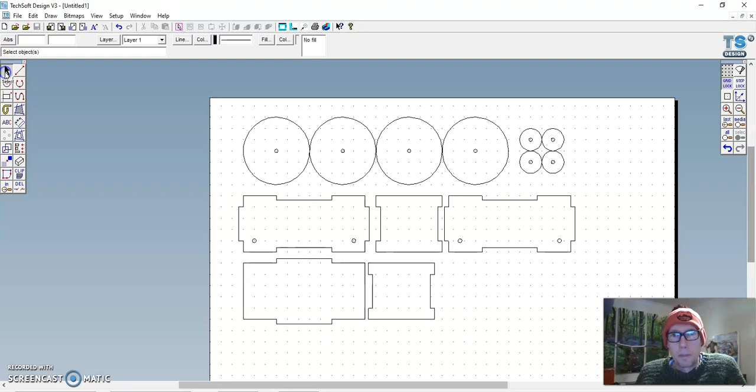So this video supports your roller coaster project. I'm going to talk you through how to make a kit of parts for your roller coaster car. I'm going to do a very simple kit of parts, talking through some key points and how to use 2D Design. So this is the kit that I'm going to make, 4 wheels and a carriage, I suppose. So say goodbye to that.

Start with wheels. Make sure you've got gridlock selected. Circles. So you can choose any wheel size you like. I'm going to go for 30mm radius, but it's up to you. Remember, the smaller the wheel you use, the lighter your car will be, and the less it will cost, which will be a bonus. So you may decide to go for smaller wheels than me. You may decide that big wheels roll faster. So this is a balance between big wheels that roll faster and small wheels that are cheap. It's up to you. So any wheel size.

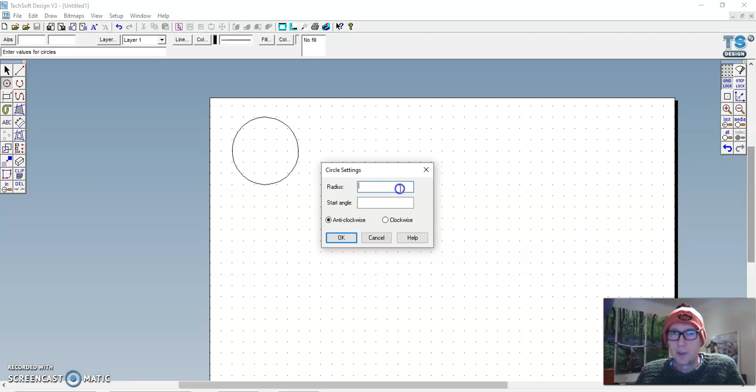So one of the decisions you've got to make is whether to have the wheels turning on the axle or the axle turning in the body. I'm going to have wheels that are tight on my axle and that turn in my body. So the axle material is 3mm diameter. So if I double click circles, it asks me for a radius. Now 3mm diameter, as you know, you've got to halve it. So that's a 1.5mm radius. And look, it's given me a little circle. I'm going to pop it in the middle of my wheel there. So that little circle, 1.5mm radius, will be a tight fit on my axle.

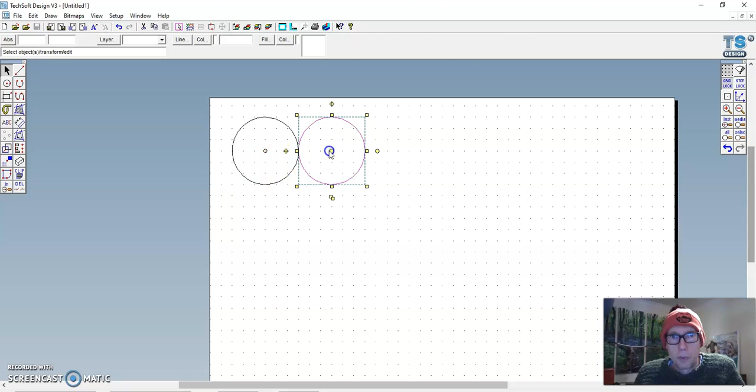Of course, I need 4 wheels. So I'm going to select it, copy it, position it, copy it, position it, copy it, position it. If you want more wheels, which you may do, roller coasters traditionally have more wheels, you can do more copies. But I'm going to stick with 4 for this simple tutorial.

So let's work on the body of the car. I'm going to make sure my gridlock is on again. Now of course the body needs to be longer than the space between 2 wheels. So I'm going to make my body this long. And about that high. Okay, so that's going to be the side of my car.

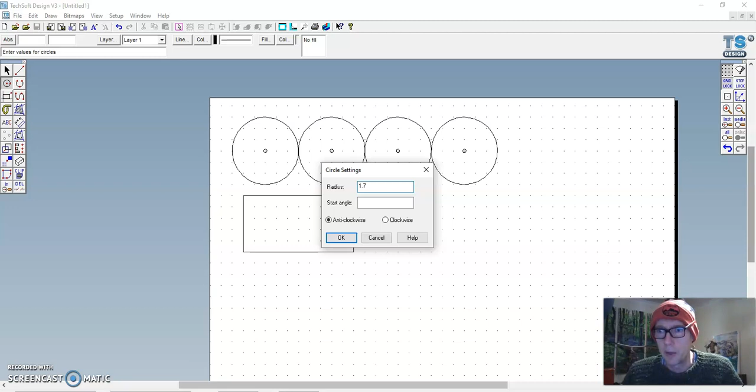Now it needs holes for the wheels to pass through, and these holes are going to be loose fitting holes. So I'm going to increase the radius just slightly. I'm going to use 1.7, and 1.7mm radius will give you what's called a running fit. The axle will pass through, but it will turn in the hole because the hole is slightly bigger than the axle. So I position my 1.7mm hole there, and I'm going to pop another one there. So I've got 2 axle holes, and the spacing is wide enough to get the 2 wheels in without the wheels touching. So that's going to be the side of my car.

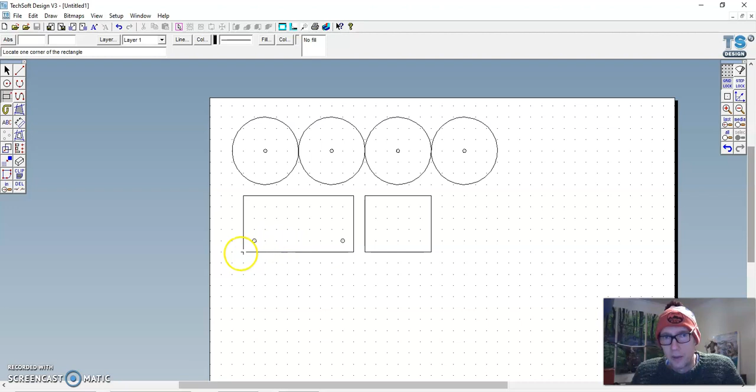The front, I'm going to make the same height as my side. I'm going to make it about that wide. Okay, so that's going to be the front of my car. And I need a base. So the base will need to be the same width as the front and the same length as the side. So that's 6 centimeters or 60mm. So I go the same length and 60mm deep. Okay, so I've got a side, a front and a base. I'm sure you've worked out that I'm going to need 2 sides and 2 fronts, but I'm going to finish drawing them first before I copy them.

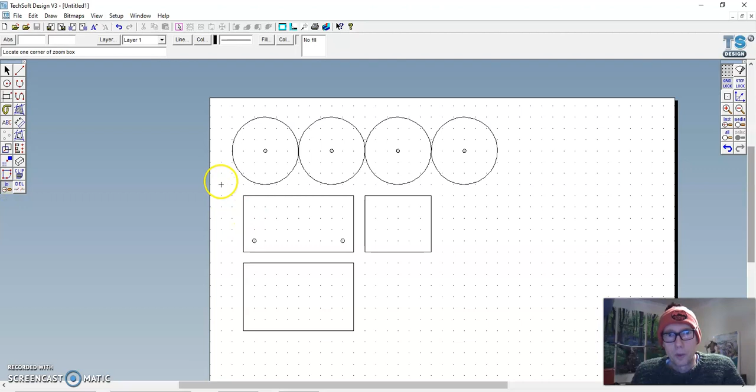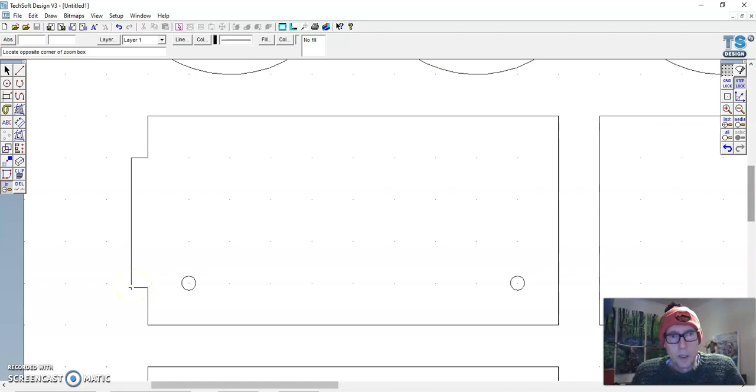When I assemble these, it will be 5 parts, I want them to lock together. And the material we're going to cut them out of is 4mm thick. So I'm going to make some little locking features. I'll zoom in a bit so you can see. So this time I'm going to put step lock on. The step lock will allow me to do 1mm jumps. So I'm going to produce a feature here. Right, I'm going to make it 30mm long and 4mm wide. Okay, so that's 30 by 4.

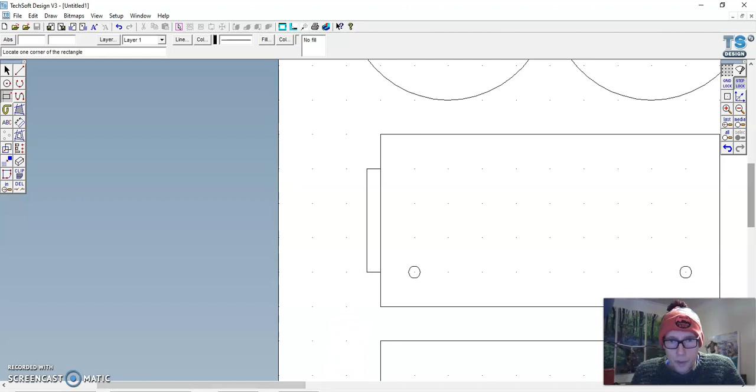Oh, I had the wrong tool selected. Rectangles. 30mm by 4mm. That's there. And I'm going to put another one here, exactly the same. So 30mm by 4mm. Remember, you're looking at this pair of numbers here to give you the size of the object.

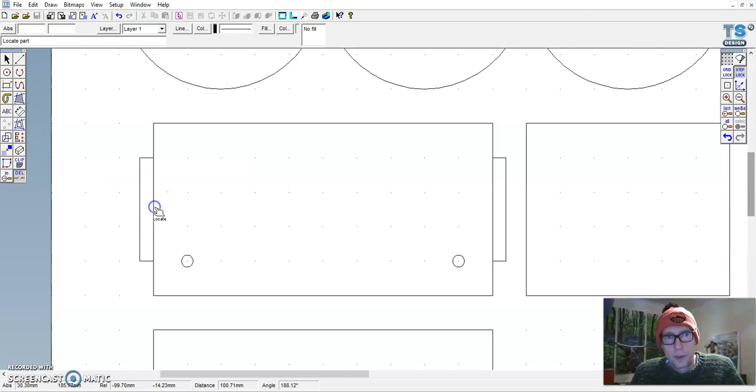Then I want that all to be one part, so I click and hold the delete tool, choose the second delete tool, and delete those lines. Now I've got a couple of tabs on the side of my car. I now need an indent here to locate that tab into. So I use rectangles.

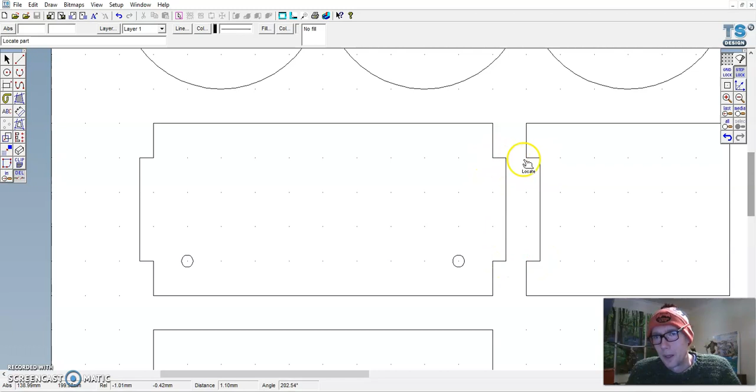This time it's going into the part. So on the sides I've got them sticking out, and on the fronts I've got them cut in. Delete the bit you don't want. Now I think you can see that that tab is going to fit into that slot. They're both exactly the same length, and they're both 4 mm thick. The 4 mm is really important because that's the thickness of the material.

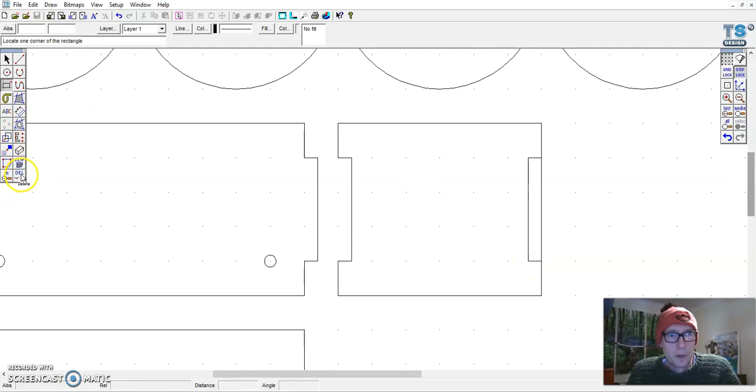And of course I'll need another one here. So rectangles, make sure you get the alignment the same. Make sure you get the length the same. 30 by 4. Delete the bits that you don't want. So I think you can see now that if I had 2 of those and 2 of those, they would all slot together to make the 4 walls of my car.

Now I want the sides to lock into the base, so I'm going to do exactly the same thing. Rectangles. Zoom in a bit so I can see better. Rectangles. I'm going to make it symmetrical, so 60 by 4 this time. And then a matching one here, 60 by 4. Okay, so I've got a tab on my base that will fit into a slot on my side.

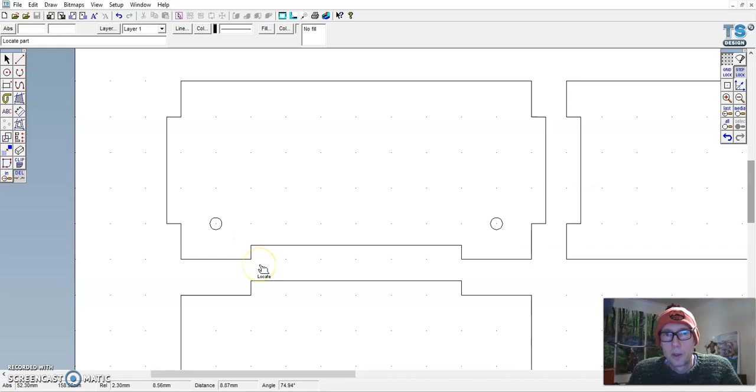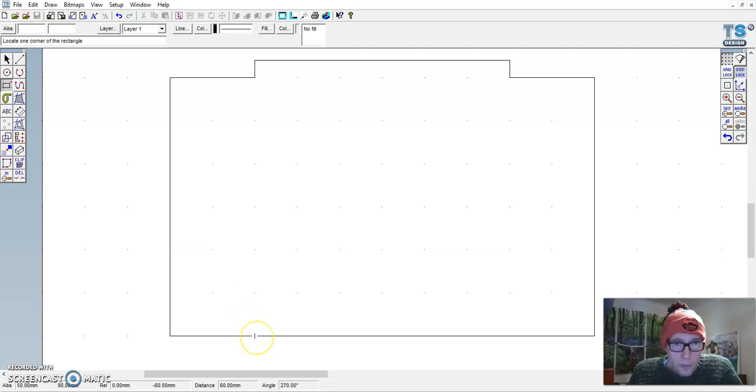And then I'm going to need another one on the other side of my base. It's just like that so I can see it. So in line with this one, down here, 60 mm long, 4 mm wide. Delete the bits you don't want. Hit all, look, that all takes you back to seeing everything you've done.

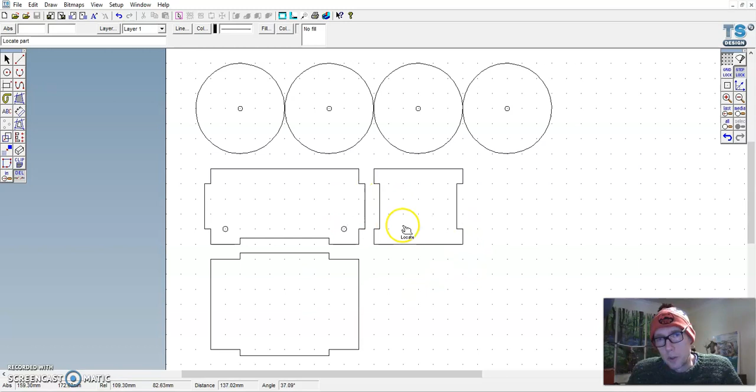So I can now imagine that I've got these sides and ends, and that this base will slot into the sides. I'm okay with it not slotting into the ends. I think just into the sides is enough. So now it's time to copy things. I'm just going to select all the parts of my side. At the moment that's all separate parts. It's made up of about 20 separate lines.

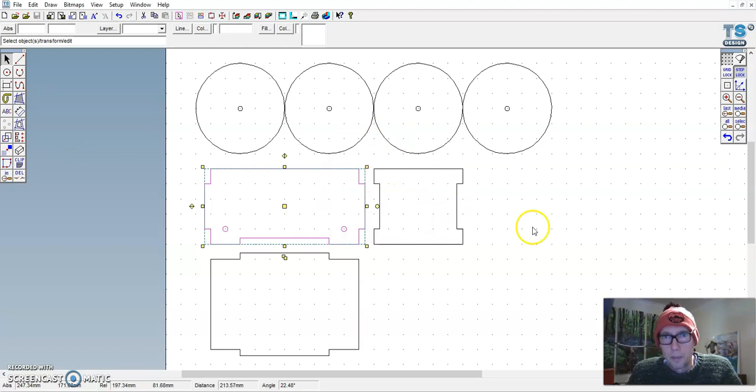And that's awkward, so I'm going to select the whole side. I'm going to go Edit, Group, Grouping Complete. Make them one object. So I'm going to do the same with my side. Edit, Group, and the same with the base. Select everything, Edit, Group. Now they're single objects that are easier to manipulate.

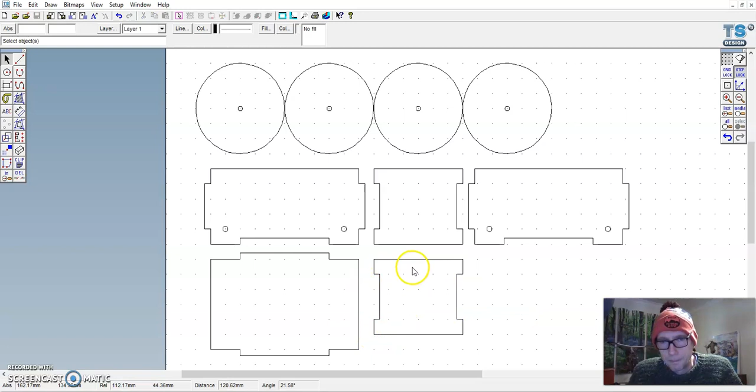So I want 2 sides, so I copy it, reposition it, and I want 2 ends, copy it, reposition it. And now I can see my mistake. Okay, that's fine. Okay, so that will make a car. If I cut 2 axles out of 3 mm steel rod, stick them into the wheels, pass them through these holes, I'll have a simple car.

My concern is that if I roll this car down a ramp, these big wheels will rub on the sides of the car and we'll get friction. And of course friction is bad. So I want to reduce friction by putting a couple of spacers between the wheels and the sides of the car. So I'm going to just make some small spacers.

Put the grid lock back on. I'm going to make a small spacer like that. I want the spacers to be a tight fit on my axle. So a tight fit is 1.5. Pop it in the middle. Okay, so that's a spacer. And I want one on each wheel. So copy it. Copy it. Yeah, and I've got 4 spacers. And that is a basic kit of parts.

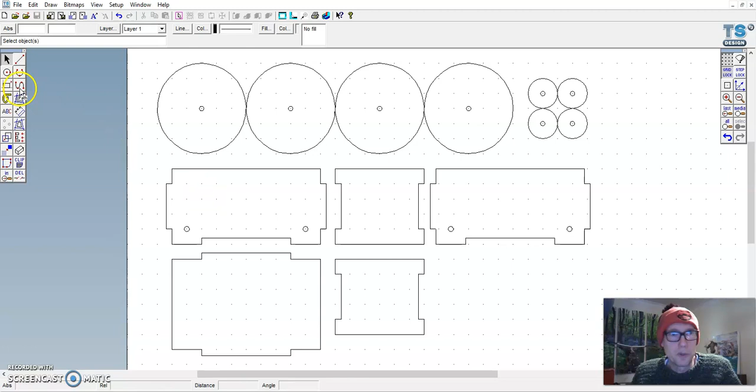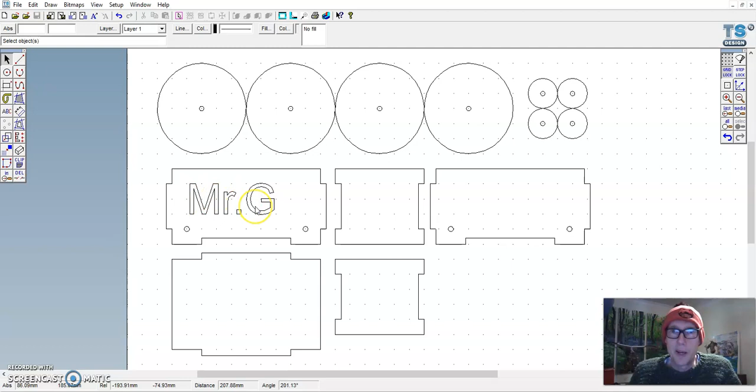Now if you want to decorate the sides of your car, you can put your name on it if you like. I'm going to call mine Mr. G, obviously. Okay. I'm just going to select the lettering and go fill, no fill. Yeah, that way the laser will cut out my name and I'll have a hole in the shape of my name. So that's all my data.

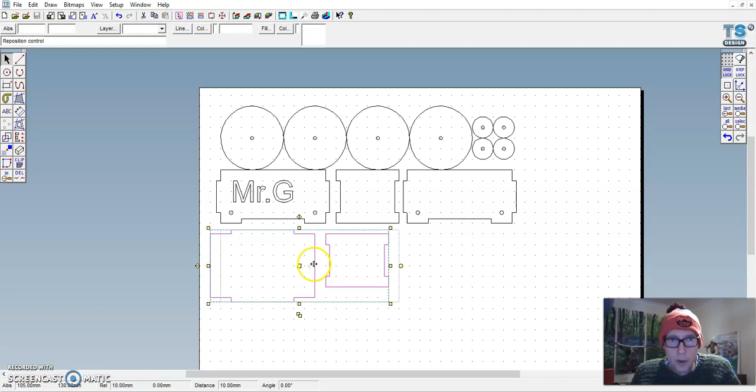Now remember, the less wood you use, the more points you're going to score. So the last thing I'm going to do is I'm just going to shift everything real close together. Yeah, so I've got no wasted material. I want to use as small an amount of material as possible. So I'm going to shift all of these parts real close up together. Okay, that's probably as tight as I can get them. I can maybe shift that over 1. Yeah, packed in nicely, minimizing waste.

The last thing to do, and this is how I'm going to test your area, is I want you to draw a rectangle around everything. Maybe like that. Okay, and then when we cut this, it will also cut that rectangle out, and I will measure that rectangle, and I will use that measurement to decide how much material you used for your car.

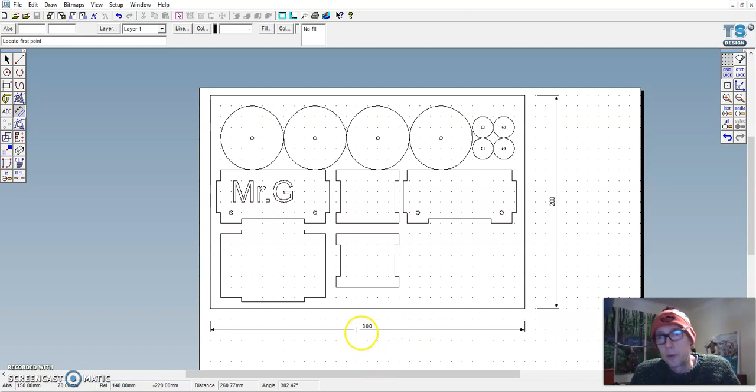So mine, if you use dimensions, look, my car uses 200 by 300. Mine uses 200 by 300 millimeters, which is 60,000 square millimeters. There you go, a bit of maths. Okay. And that is the end of your tutorial.

Good luck with your cars. Remember, you can make them more streamlined if you want to. You can make them longer if you want to. Length might be good. You can try and make them streamlined if you want to. If you want to add streamlining, you might find that adds distance.